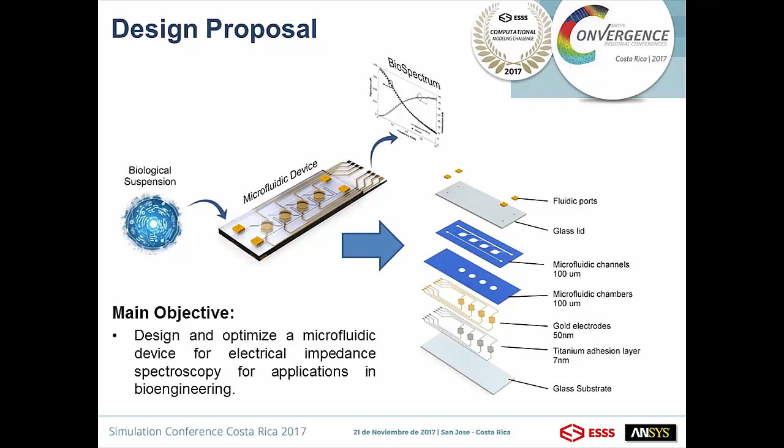The planar electrodes work as sensors which allow us to measure the suspension impedance while perfusion of the medium feeds the cells for long-term experiments. Modeling and simulation tools are of great relevance to this field. Using ANSYS packages for simulation, Biospectrum aims to define and optimize the geometry and dimensions of the microchannels and microchambers; define and optimize the geometry and dimensions of the interdigitated planar electrodes; and define a standard protocol of use for the device.

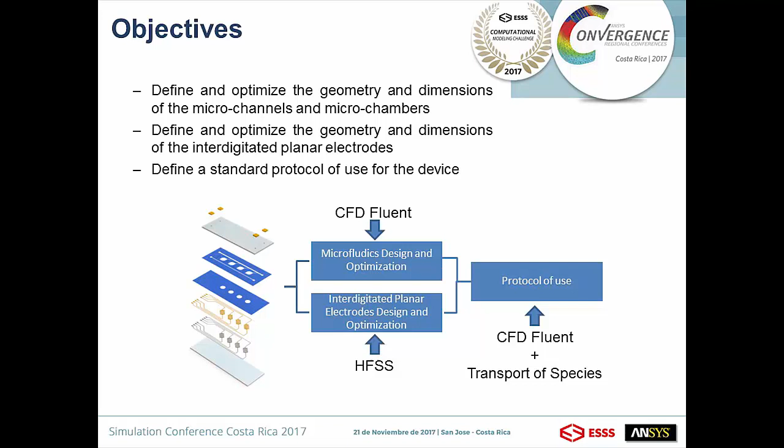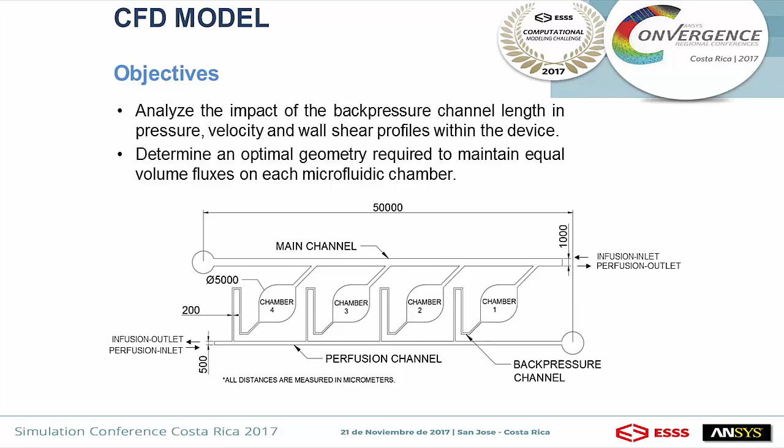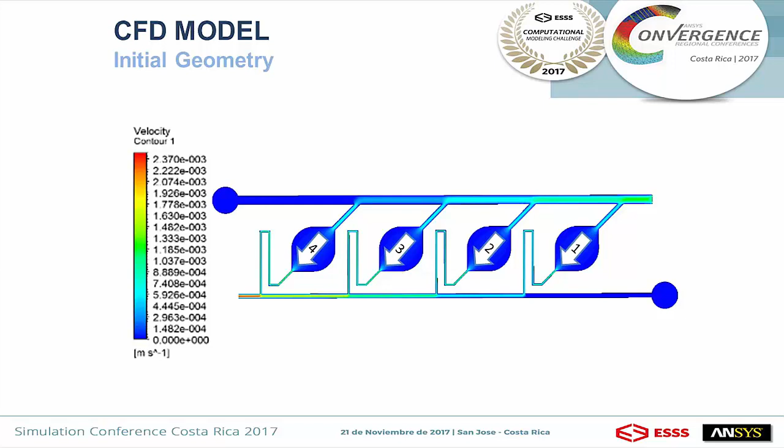The CFD simulation has 2 main objectives. The first one is to analyze how the shape of the geometry impacts pressure, velocity, and wall shear stress profiles. The second objective is to optimize the back pressure channel's length in order to obtain equal flows in each chamber. The first step of the simulation is to analyze the original geometry and determine the initial values of the flows inside each chamber, along with the maximum pressure, velocity, and wall shear stress. The optimization was done using this data as a milestone of the experiment design.

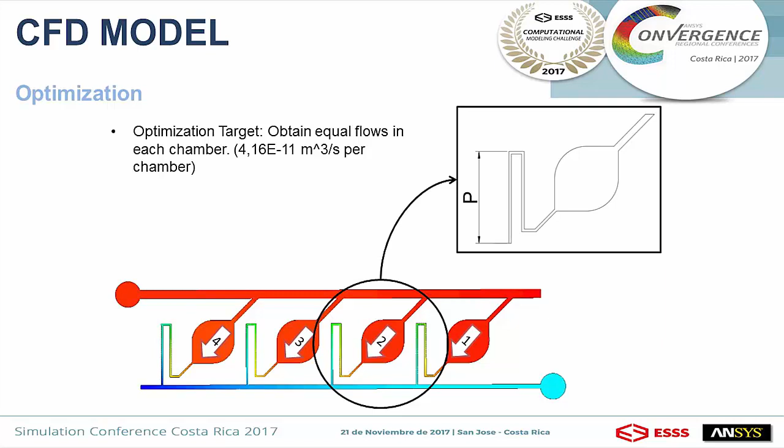A response surface was created using the ANSYS Response Surface Optimization package, characterizing the variation of the output parameters as a function of the back pressure channel length. After a mathematical optimization process, the final geometry was obtained. This geometry guarantees equal flow rate throughout the chambers with a maximum difference of 2% with respect to the target flow.

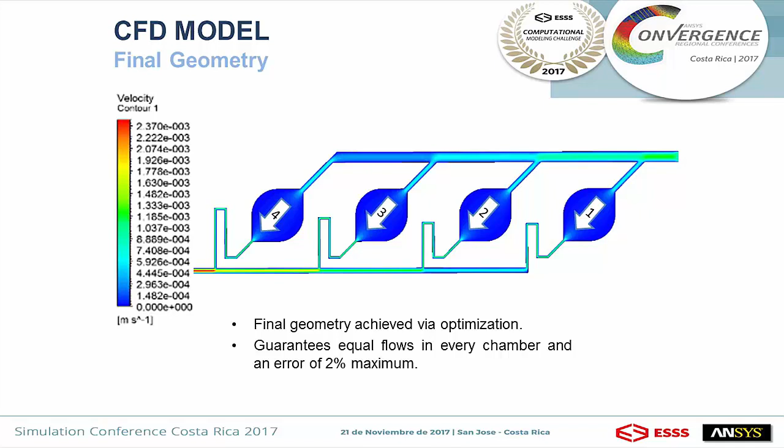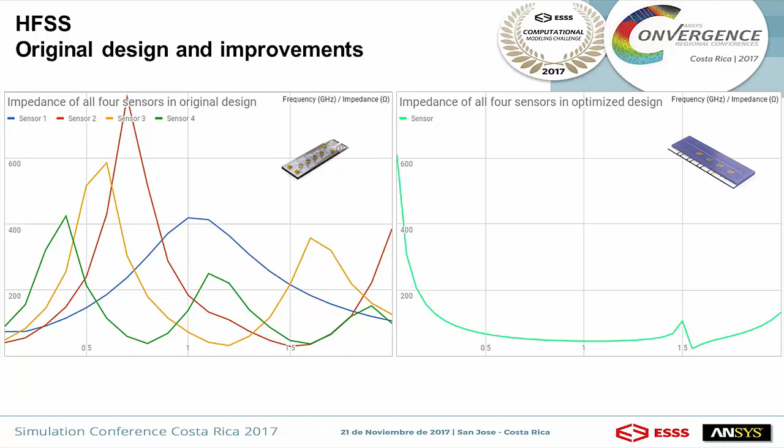HFSS was used to verify the functionality of the coplanar capacitors at the expected frequency of operation. After analyzing the results of the original geometry, the decision was taken to change the design in order to keep more consistent characteristics throughout all 4 sensors. The simulation of the S parameters shows that the device presents little reflection for the range from 0 to 2 GHz when matched to a 50 ohm impedance.

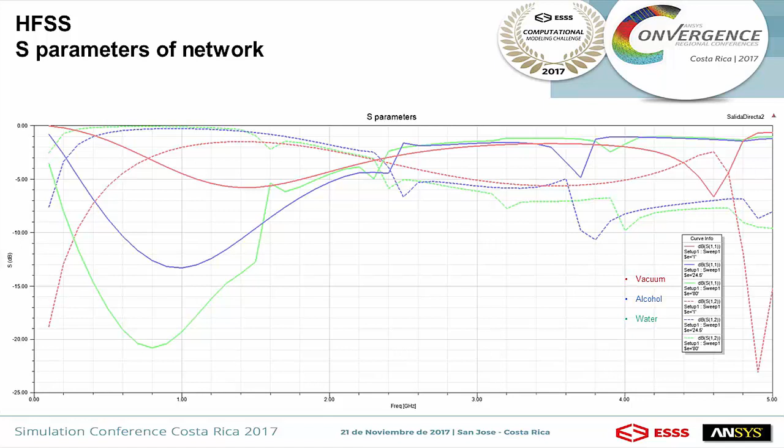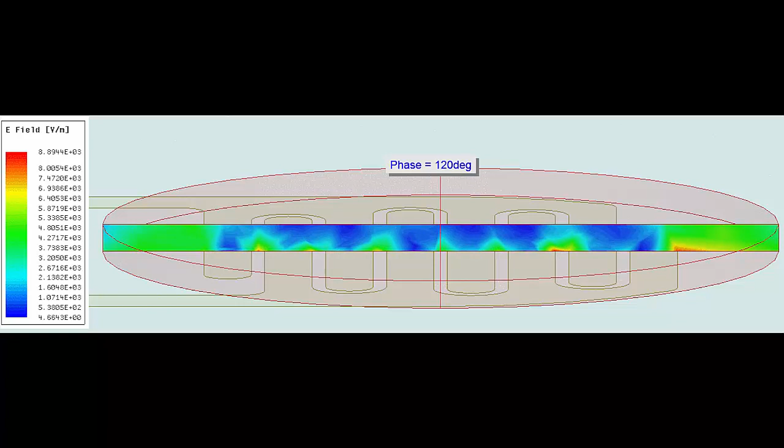Protocol of use. The use of the microfluidic device has 4 main steps. First, the infusion is carried out. A flow of biological suspension is added to the inlet of the main channel. By applying the appropriate pressure, the suspension will enter and load each microchamber. Once the microchambers are filled, the infusion is stopped.

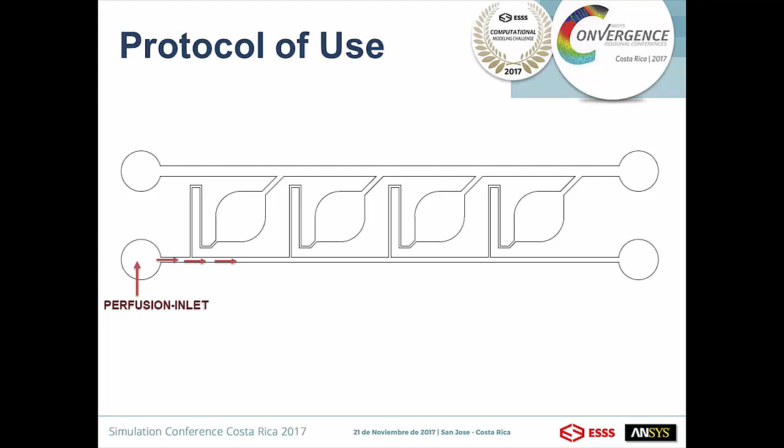The second step is the perfusion. A continuous flow of culture medium is introduced in a perfusion inlet in order to allow long-term impedance measurement. Now, the measurement of impedance can be made.